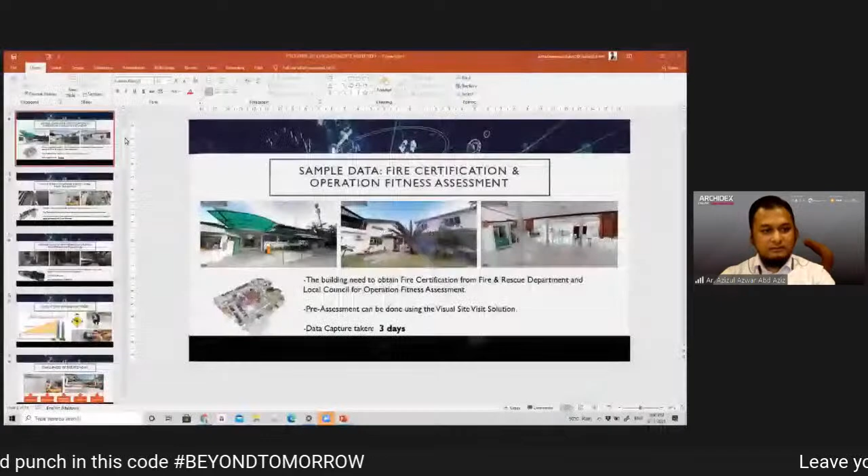So the topic is the future of conducting site inspections using 3D data capture. When I say future, it's not really a new industry; it's been around for quite some time. The data capture has been used in oil and gas for about 10 to 15 years, but it's quite new how the architecture or building industry started using the technology for managing projects, collecting data, measuring buildings, and so on.

I hope this small step of ours can benefit the architecture community a bit. So basically, how is 3D data capture actually being involved in the construction industry? Because like I said, it was in the industry for quite some time already. But then when the pandemic came, it triggered people to see the benefit of using it more and more. Before the pandemic, it was something that was good to have.

So we hope that after the pandemic, after we use it on certain projects and expose it to certain clients, that people see it's not something that is good to have, it's something you must have for a project.

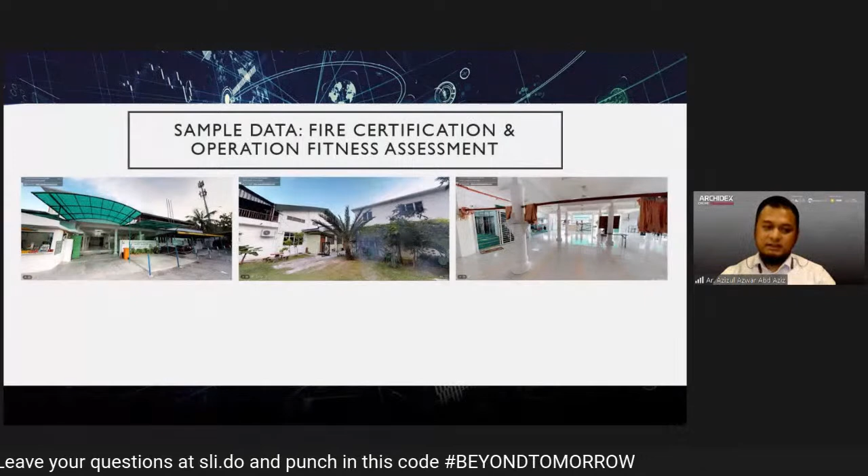So I'm going to start with some of the projects we did. This is a small project - actually, I can say this is our first project using the data capture. This building needed to obtain a fire certificate from the Fire Rescue Department, Bomba, and local council PBT, for the operation fitness assessment.

So what we did essentially was a pre-assessment using the visual site visit solutions, or what we call 3D data capture. For a building of about this size - around 3,000 to 4,000 square feet, a two-story building - it's a complex building, quite big.

What I'm going to share with you is how the output of the data capture will look like. So assuming you are my client, I'm going to present to you - this is what the building is like, a walkthrough inside the building. This is what we show to the client, what we have at site. This is actually a completed project.

When we capture the data in the progressive site, say for example this part of the building hasn't been plastered yet or we haven't put paint yet, we can see that. For this particular month, this area hasn't been plastered yet. So for the next month, we can see the progress. It's easy for a client or QS to evaluate if we want to certify the progress payment and so on. I'm going to show it to you simply.

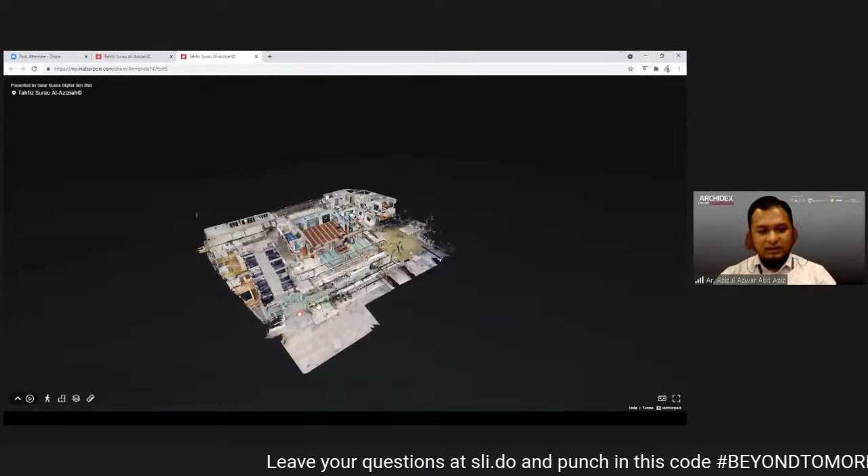So this is one of the outputs, the value of the output that we can introduce to the QS on the team. So the data capture, the output is something like that. You can have a dollhouse view, right?

You can rotate it. It's really what we call a lights platform. You don't have to install anything. You just open the link, click the link, and you can open it through your phone or laptop without using any other platform or installing any other software.

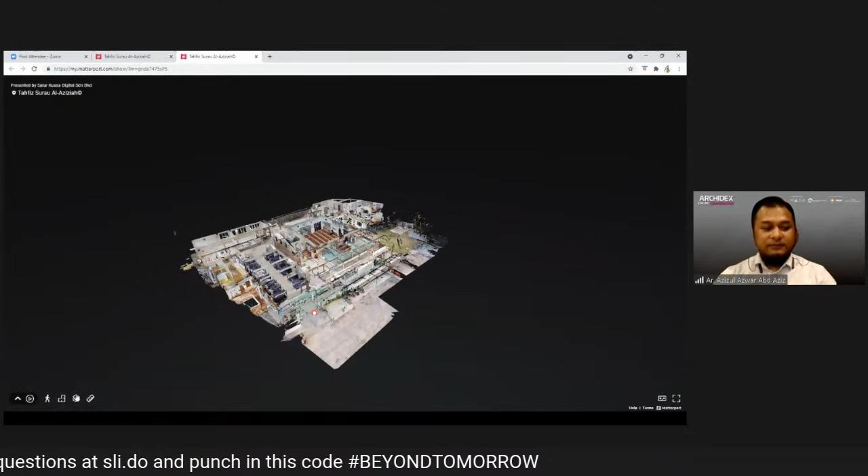So we can either decide to go to the second floor, and we can straight away get inside the building as if you are measuring the site. If you go to the first floor, for example, okay.

Like I said, when you are capturing your data, sometimes you miss certain points, for example how many rings inside for this column. So you have it, but you forgot to capture how high is the gap between each ring. You can always get the picture and just measure it.

For example, let's do some tests. So this tile is actually 1 feet. So we can measure the tile and we get 1 feet. That's how we measure the data.

For this particular project it's for sampling only, we don't take detailed data. If you go for detailed data, we use a high resolution camera, higher spec, so we can get more accurate information. For this particular project we just do something simpler.

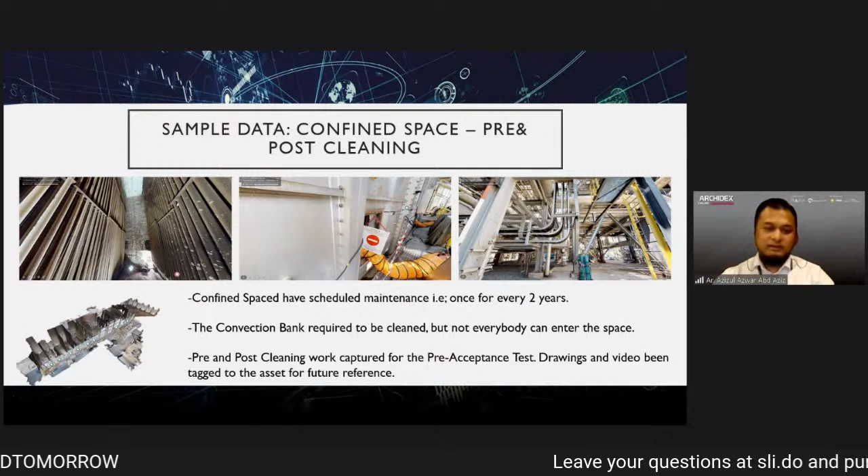This second project I'm going to share with you today is actually a confined space in the oil and gas industry. For this particular project we have to conduct cleaning services. The contractor has to conduct cleaning services for a confined space, but the client wanted to see if it's really clean. The confined space is not really safe for everyone to enter, it's dangerous, so you have to have a certain license or be equipped with certain equipment before you can enter the place. So we enter the place and get the data before and after the cleaning services have been done.

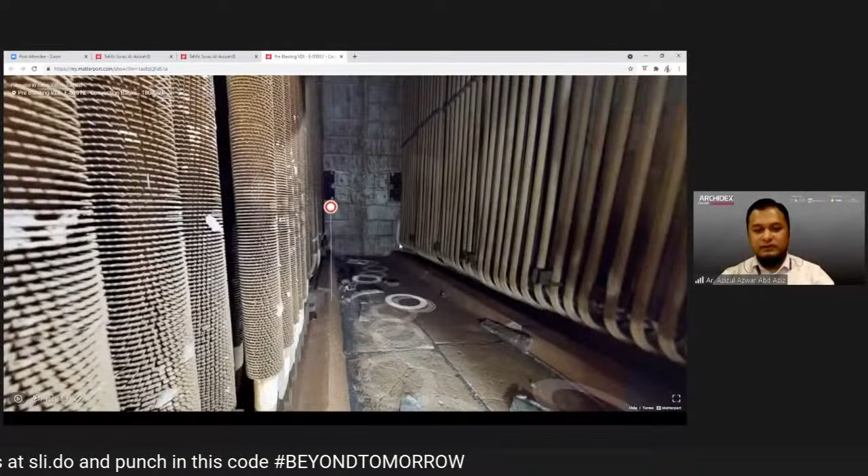This is how we call it blasting, the cleaning, we call it blasting. This is how the building looked before it was cleaned. You can see the dust in the gray area, gray dust like that. So we can link the two scenarios, before and after the blasting. This is how it looks after the blasting services, the cleaning services, have been done.

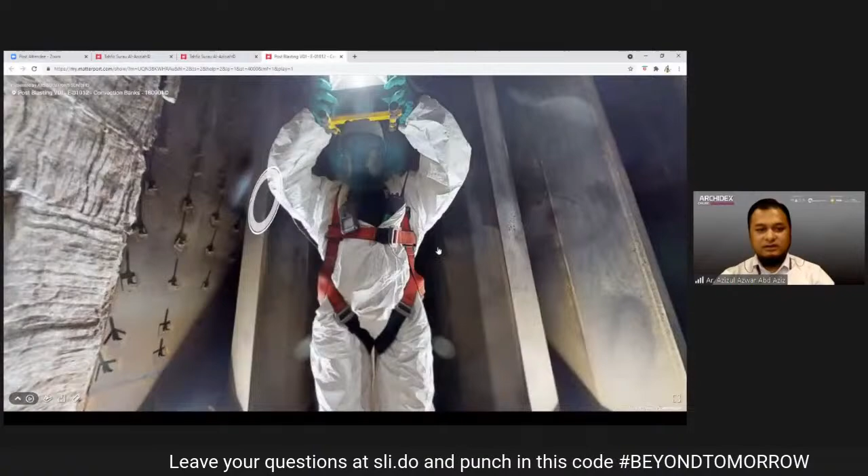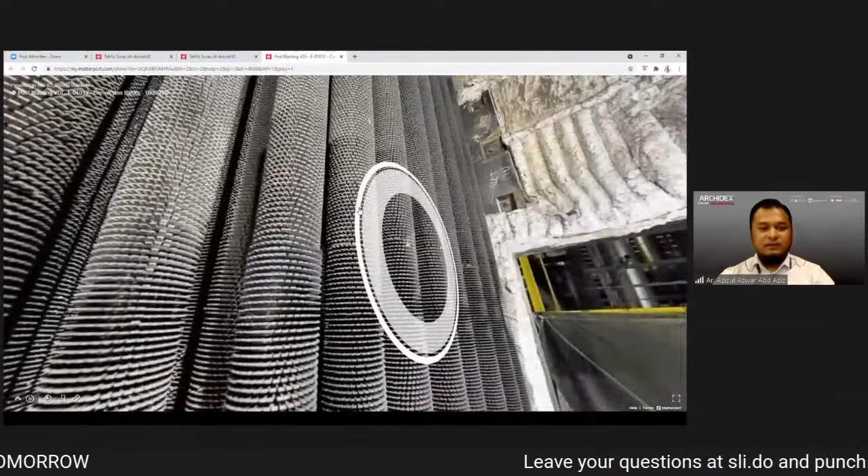If you're familiar with the services, then you understand it looks a bit different. This is what we show to the client. We can show either how many kilos of dust have been removed from the area, and we can link it with the video. That is how we share with the clients the progress of the project, things like that.

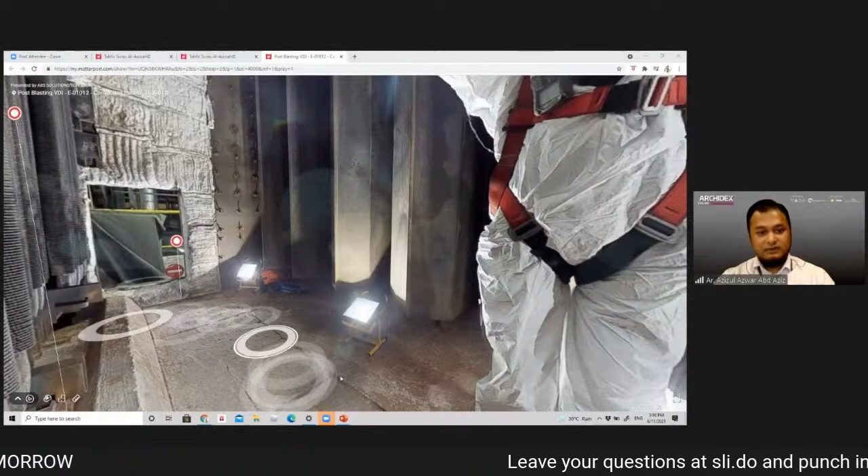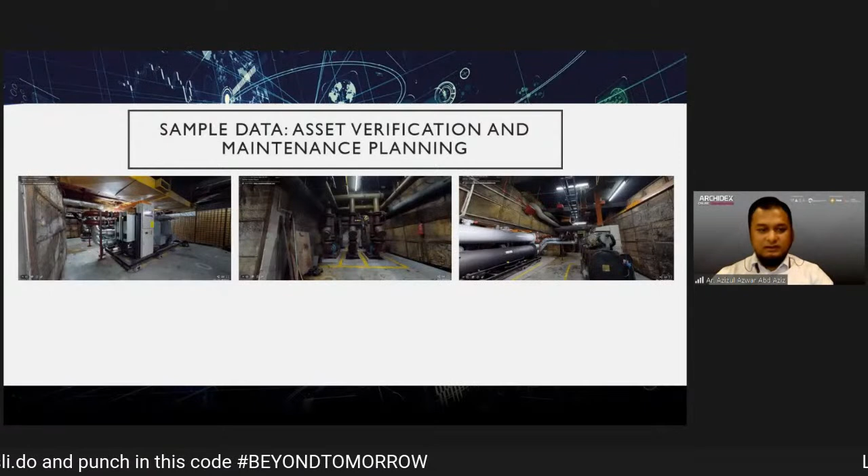So basically, another sample. I'm not going to share the link of the video, but it's quite the same. When we measure pipes of the M&E room, for example, for this particular project, the client didn't really have as-built data. So we came in because it needed to be done quite fast, to get the data quite fast, to produce a drawing quite fast.

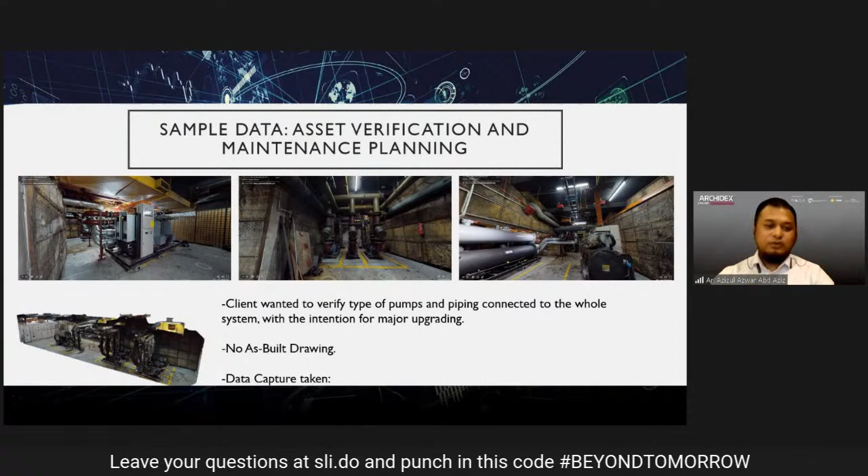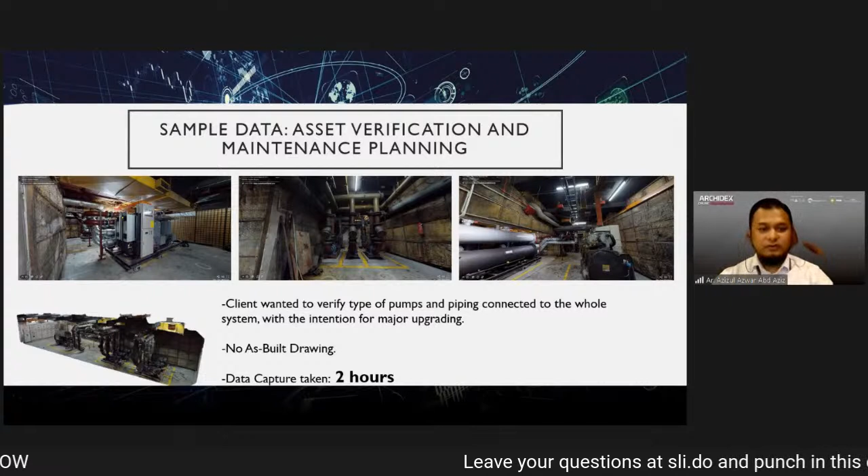So they engaged us, and you guess how long we took the data, without having to come back again? Just 2 hours. We went to the site, captured the data for 2 hours, and then we went back and started producing the 3D drawings from there. So basically, that's how 3D data capture is - it will put whatever methodology was used back then into obsolete.

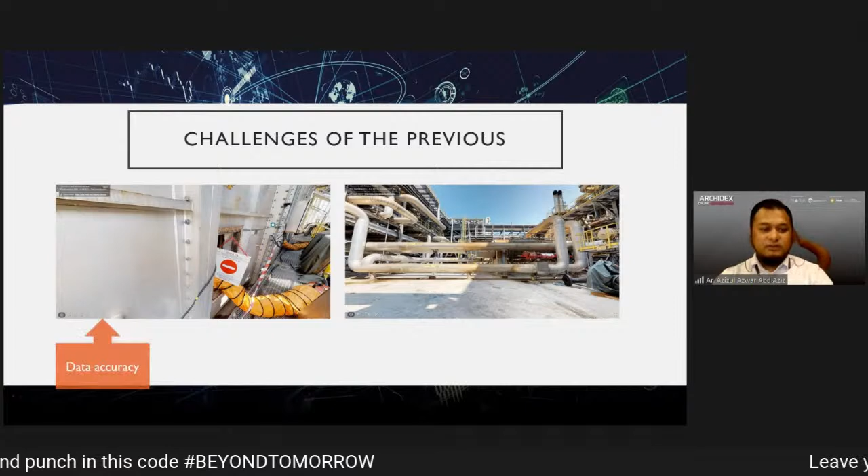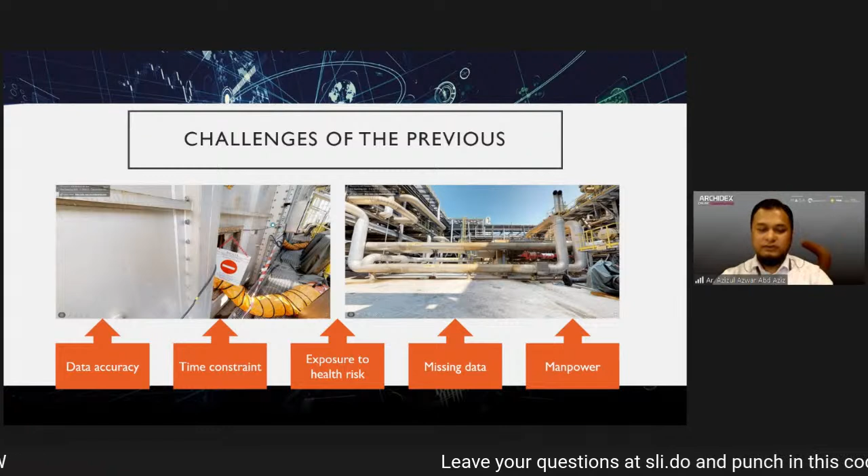So why do we try to engage with the technology? Because the challenges of the previous method - data accuracy is not that accurate, there's time constraint, exposure to health risks especially during COVID, and in oil and gas we try to avoid non-skilled people going to site without full protection or understanding how they should go about on site. We want to reduce missing data, and of course have lesser manpower.

So what needs to be improved here? Basically, the improvement is to reduce durations, reduce manpower, and the client or whoever wants to review will have live feed info. We're going to improve the accuracy of data capture, and it can be accessible faster to anyone we want to give access. And then, we're going to reduce mistakes, because from the data we're going to draw exactly how it looks like. I'm going to show you a bit of the image of how it will be imposed.

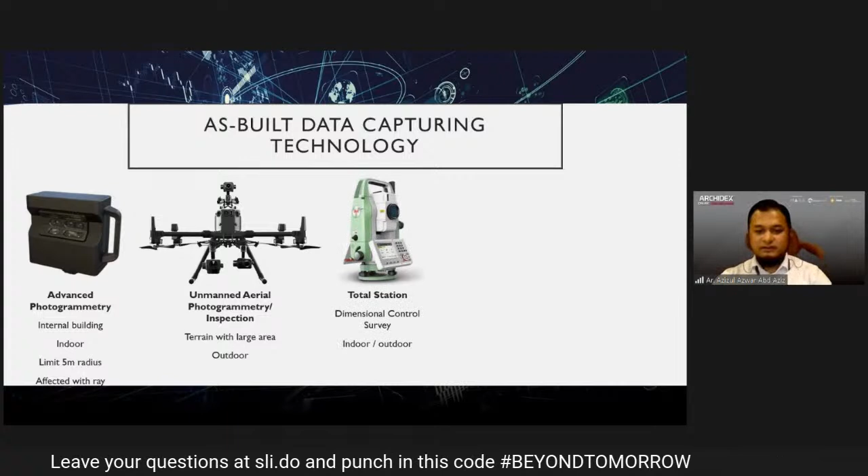So as for the accuracy, these are some of the equipment being used. I think some of you have seen the camera, advanced photogrammetry, drone, total station, or radio topography. Also we have 3D laser scanner. Most of what I'm using is actually advanced photogrammetry and 3D laser scanner.

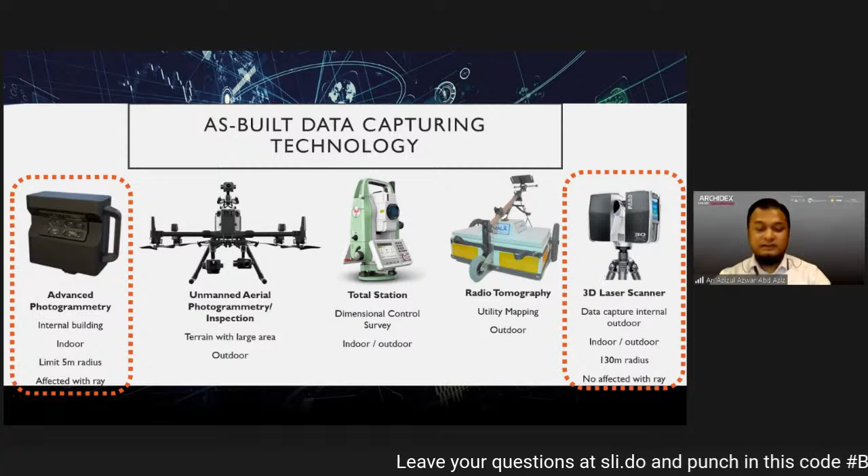Because of the purpose we use to capture the data, we don't need to go above the building - sometimes we don't need to go above the building. We can actually capture using just the 3D laser scanner. From that scanner, they can predict or model what's on the roof. So we just use those 2 scanners only.

But for the challenging sites, like stadiums, things like that, we use the drone for the data capture. So how it was done - basically first we will go to the site and capture the data. We will upload into the cloud, and then from the cloud we will extract the data.

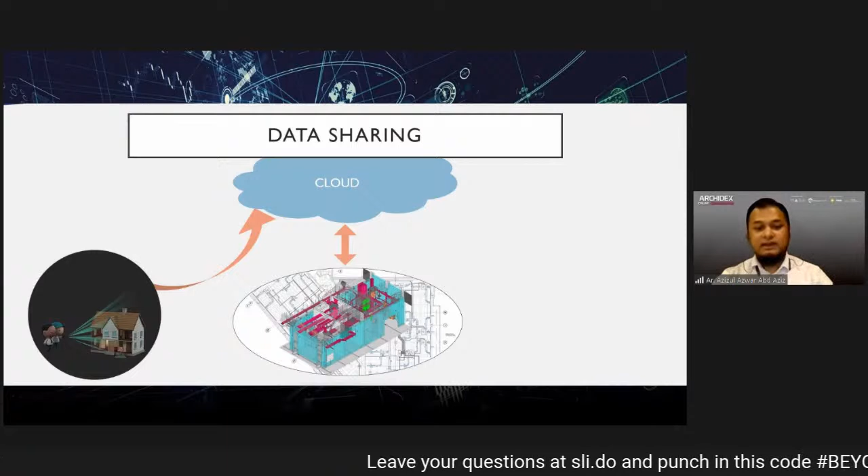The data is actually, it's like you go on Google Street, right? So you can walk through this building. When we capture, it will be stitched together and produce a 3D environment inside the cloud. So we will trace the data, the building, the elements, because the element is actually in XYZ kind of angle. We can trace it and produce data, then upload back to the cloud, and the client, while flying, can view whatever information they want to see. They can view the 3D data or the model data that we upload into the cloud. So basically, that's how we are doing it.

Most of the projects I share here are actually oil and gas projects, because we want to share how accurate the data can be produced or captured using the technology. So this one is actually in Hong Kong. Those are the dots on the far left, on the Google Earth image. On the second image, that's the data we captured.

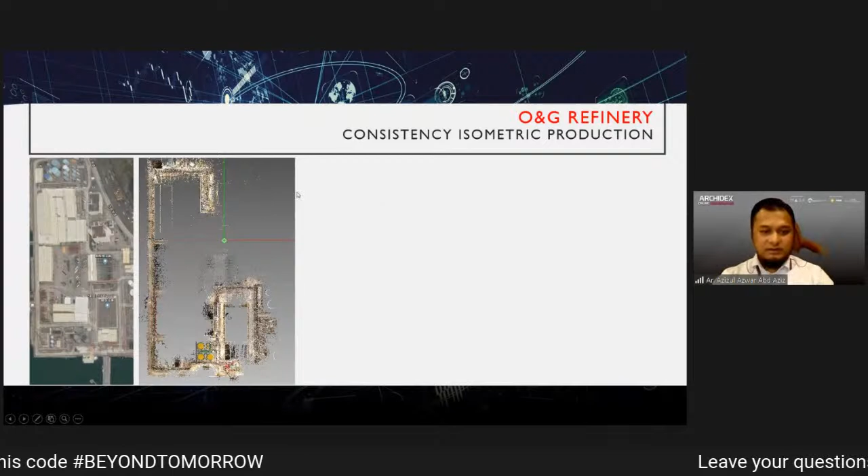The gray area is somewhere we don't go, so we don't have the data - it's not necessary to have the data there. From there, we superimpose the data we captured into a 3D model that we produce, shown in yellow and green. You can see the green line.

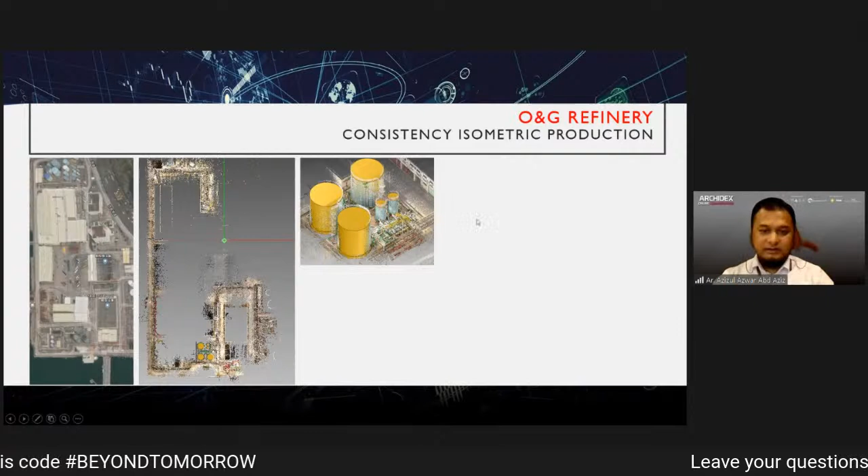So here is actually the final product of the 3D data that needs to be produced or shared to the client.

And we can have survey reports, 3D model reports based on this, or 2D CAD drawings. It can be produced in any way. So it's actually a powerful tool or equipment that you can use to enhance your skills and your service to your client.

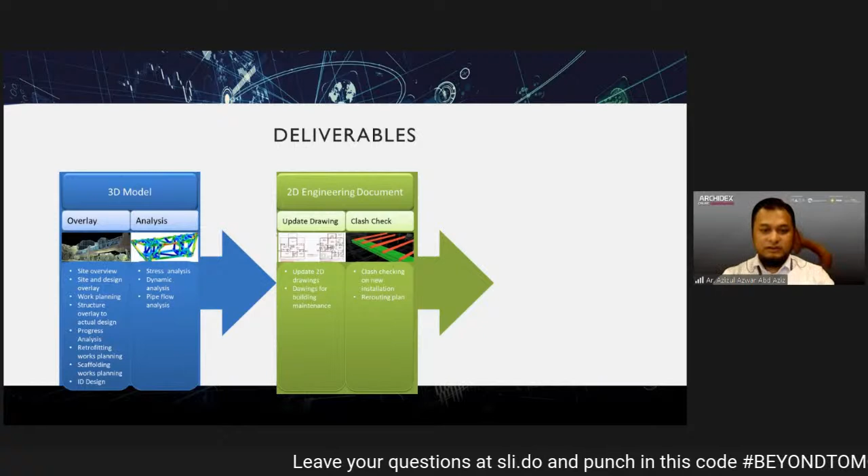For this, some of the deliverables we can produce include 3D models overlaid with existing buildings and also the new design. We can produce 2D engineering documents, which are all architecture drawings, and then engineering reports or architecture reports or building reports.

So here on the far left is actually one of the data sets that we captured and reproduced as drawings.

In oil and gas, they have monthly or quarterly checking, so they have to check the pipes. Is it still in order? Is there any additional pipes? Is there any loss of oil along the way, leakage, things like that?

So they have to constantly produce as-built, because when they created a new pipeline, sometimes no one knows about it. So when they went to site, they'd ask, why is there another pipe here? That's why they need to constantly use it. That's why 3D capture is quite handy for them.

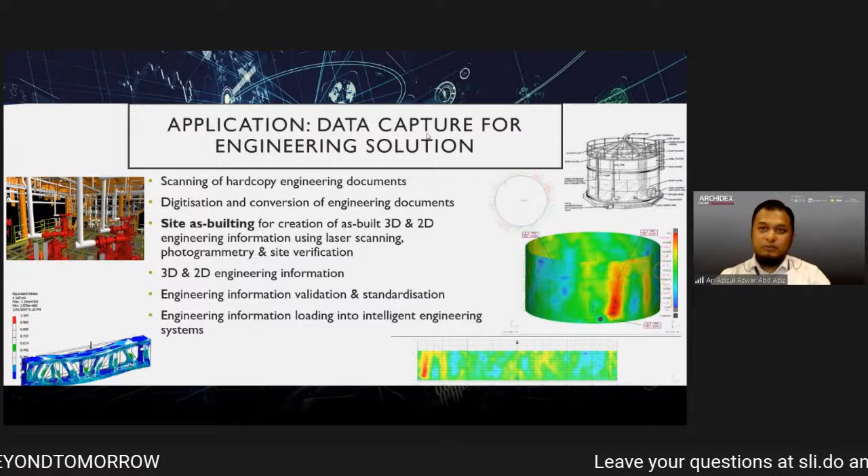For the construction stage, how will the 3D data capture benefit it? Actually, we can have a phase-by-phase development monitoring report. You can produce a report monthly - you go to the site, capture the data, and then produce the actual current conditions of the site.

So next time, you capture another set of data. When a contractor tells you how much you should pay them, you can approve it - this is what you've done last month, this is what you've done this month, and these are the differences that you should be paid for. So it's actually a phase-by-phase monitoring report.

You can provide retrofitting, design changes, fabrications, or you can have the dimensional control survey of the site.

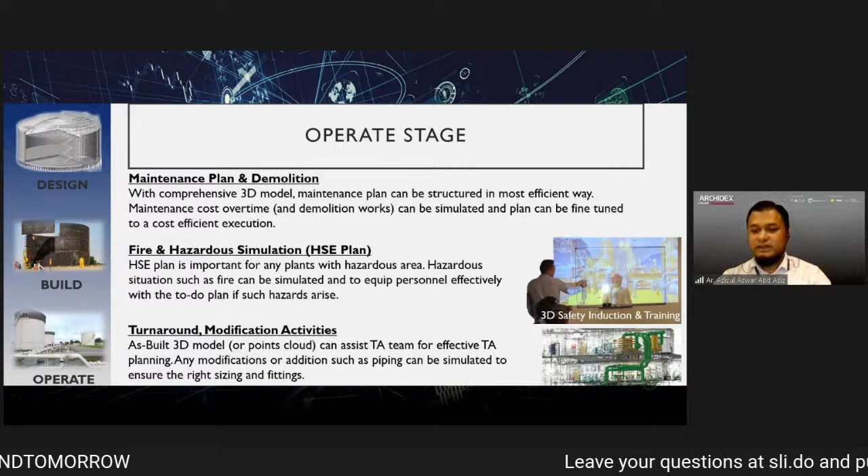During the operation stage, we have maintenance planning and demolition. Before you demolish the building, you can plan ahead - you can identify what type of crews you're going to use later on, and what type of equipment or machine you're going to use for demolishing the building.

It can also be used for fire and hazardous simulations - I'll show you in a bit - and for turnaround modification activities. So basically, you can assist your team with effective planning.

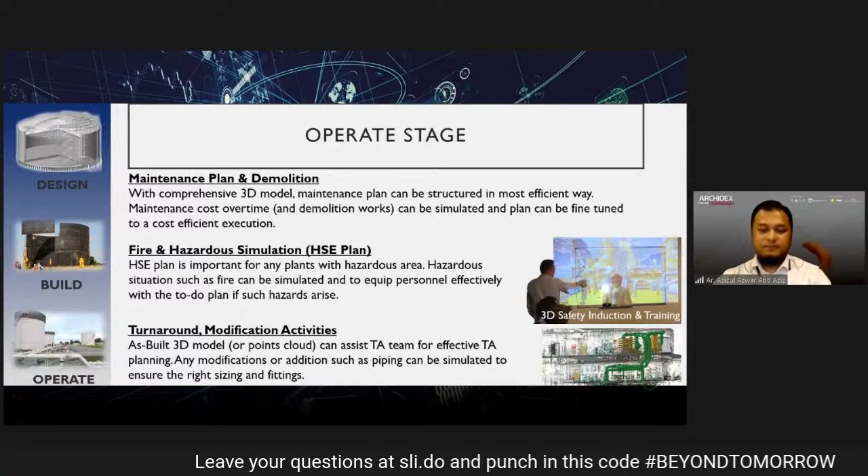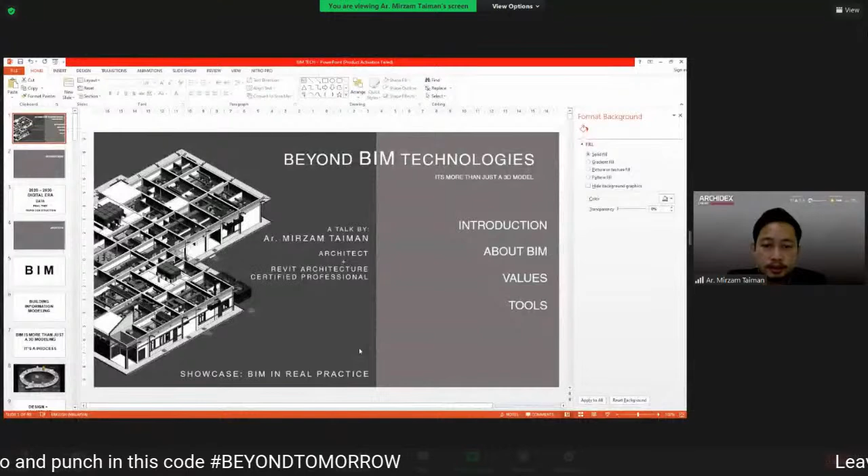Okay, let me start with the slide. The title is about BIM - beyond BIM, technologies that are more than just a 3D model.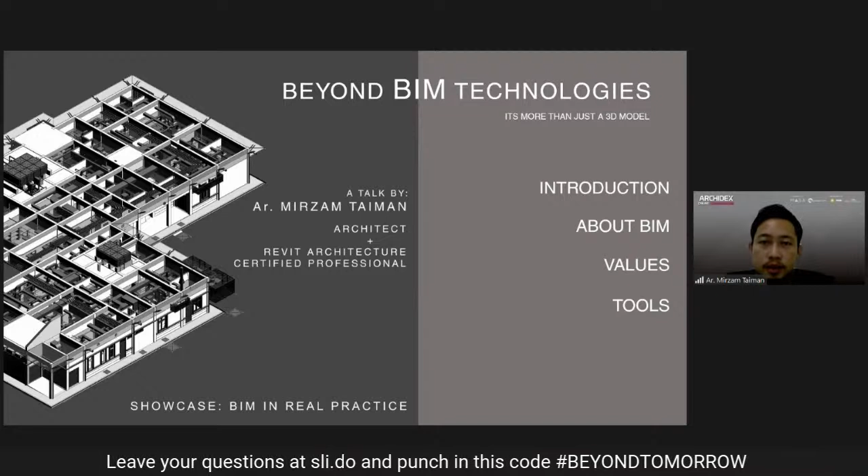I will guide you through some pictures and my experience after involving in BIM, started in 2012 until now. So let me give some introduction here.

Actually in this era, 2020 until 2030, this is the digital era where everybody must be aware of this. Architects must take lead in this era in digital platform, because in this digital era we play with data, big data, and then we play with real-time simulation, and most of construction goes for rapid construction. They have several new ideas and revolutions in construction in this digital era. This is the target in these 10 years, until 2030.

What is BIM? I will share about this, because BIM is building information modeling. This is what we are going through in the future, the near future, because this brings more value in our AEC industries. This is not just 3D modeling - it's a process of building a single model, and then you can develop from programming, conceptual design, detail design, analysis, and so on, until the construction has been done and straight to the operation and maintenance stages. This is the cycle of building information modeling and the technologies involved here.

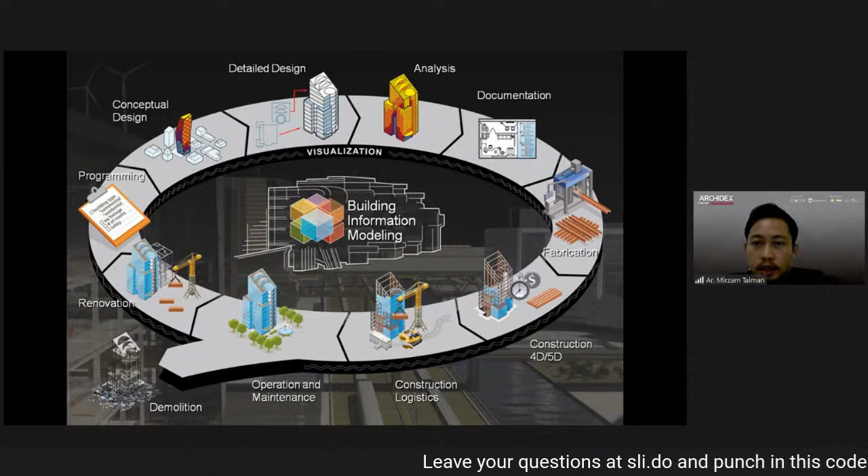BIM can be considered as design - we design and construct a building virtually, in computer, in software and tools. We see problems in digital, and we solve in digital.

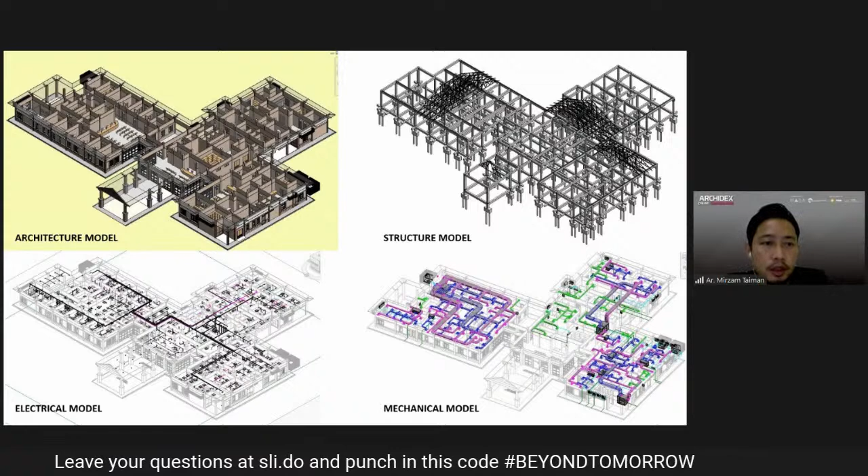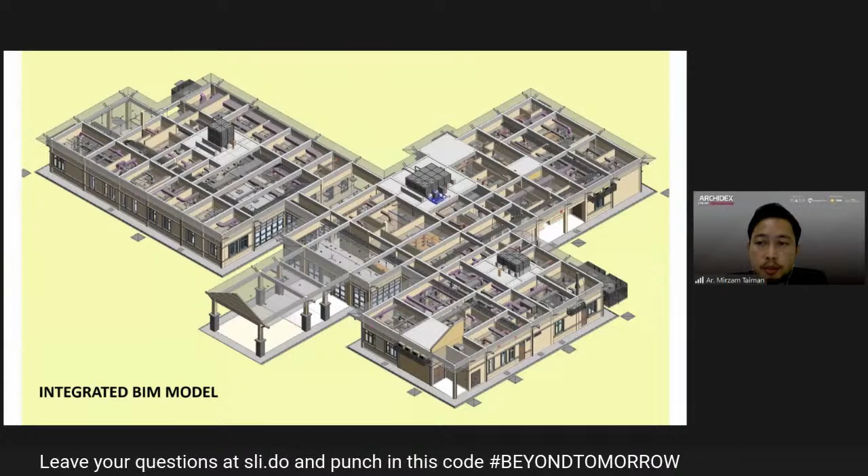We have an architecture model, a structure model, electrical model, and mechanical model, and then we combine them into one integrated model to show the complete building. This complete model can be used in design, in coordination, through construction and so on, until operation and maintenance after the building has been completed. We can see those services, structures and architecture models combined - it looks like a finished building, but in virtual mode.

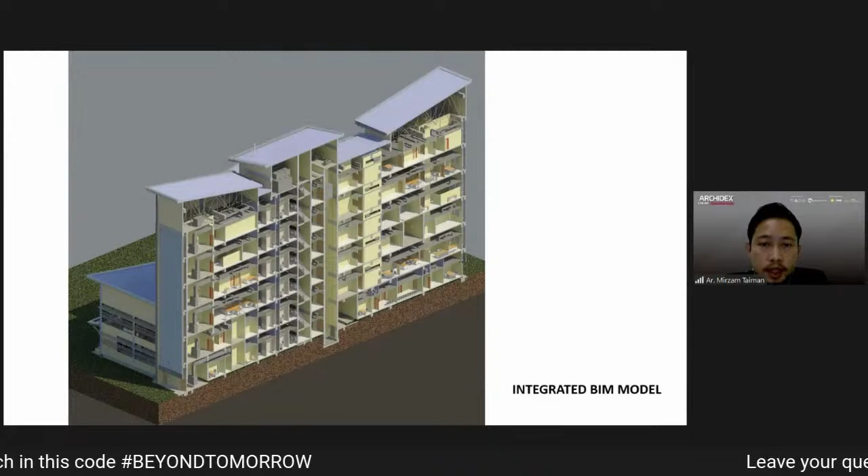Here's another integrated BIM model sample. We can see those services in buildings and all the integrated models inside. In 3D view, we can see those spaces so clients can understand, because the client is a layman - they can see what is going on in their building, so it improves their decision making later in the design process.

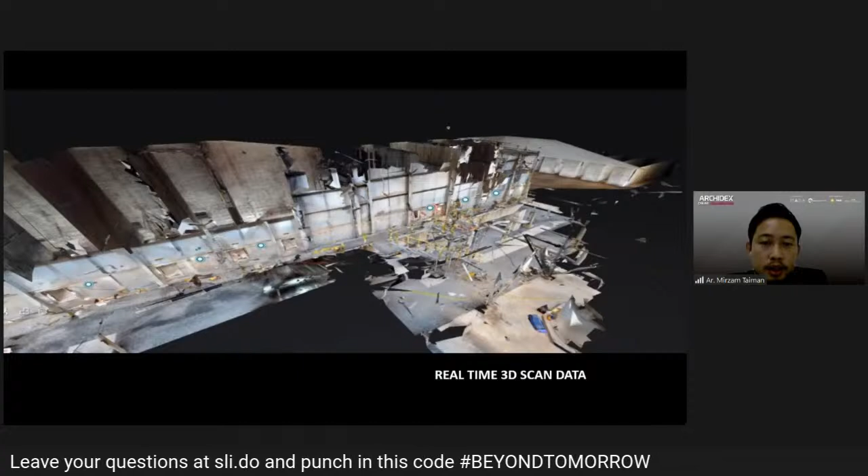In a BIM model, we can also remodel a building virtually from 3D scan data as a BIM model. This data was captured from the previous Azizul Azwa lecture. From this data, we can make it into an accurate 3D model based on site measurement - real-time 3D scan data. So it helps a lot.

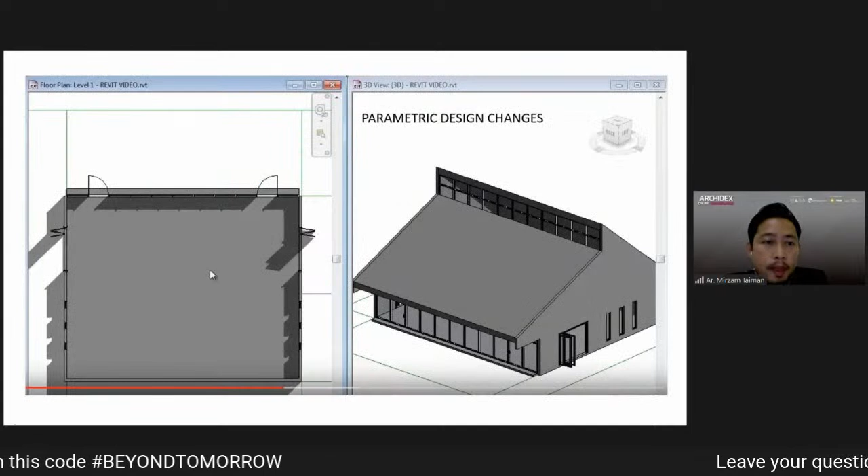The model comes with information and parametric behavior - it's not a dumb model, it's not a surface model, it has information and parametric design. Once you make design changes, because the model is parametric, when you change a component on plan, it will automatically update in elevation, section, and all views - because you're changing the component, not drawing lines.

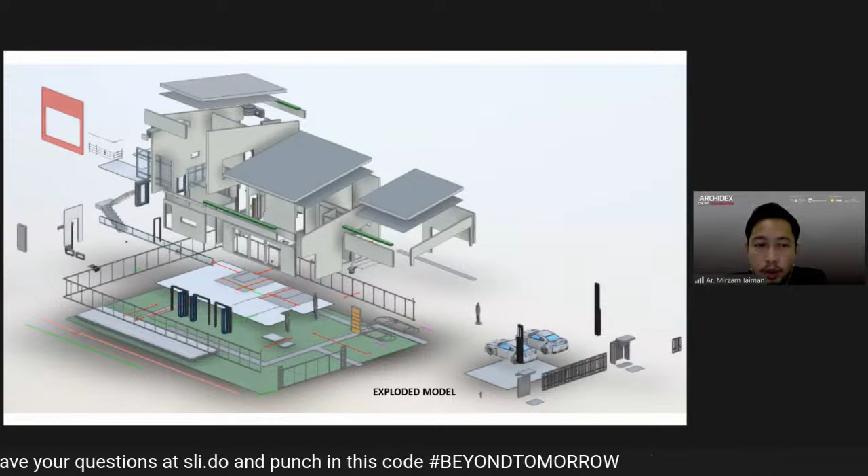Next, a BIM model is component based, not line based. Let me show some pictures. Because you are modeling a component base, you don't draw a line for walls, but you model walls, and then you model doors, and put them into a certain location to build a building in virtual mode.

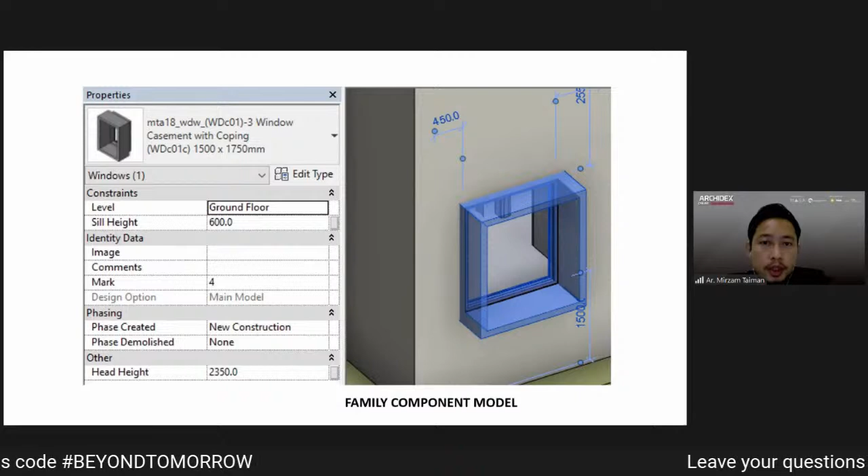The model has several properties and information with dimension, materials, and location—really complete data. That's why we call it building information models. This data is really useful in design and then in construction later.

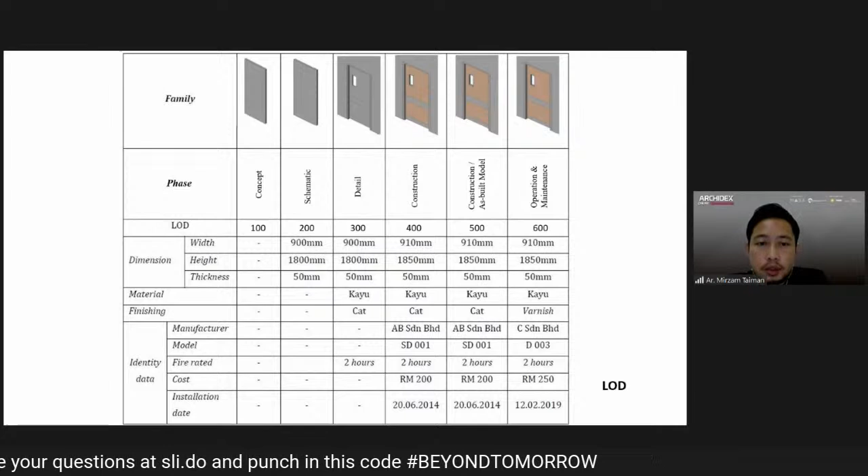Really integrated. This is the phases of design development of the model. Before going into detail, we start from the concept, and we call it LOD 100, 200, 300, or 400 until 600. The model keeps changing parametrically, with the information data inside the model instead of just geometry.

We can improve site inspection and decision making using a single model that we have done from the integrated models. As in our previous project, we were doing this kind of exercise.

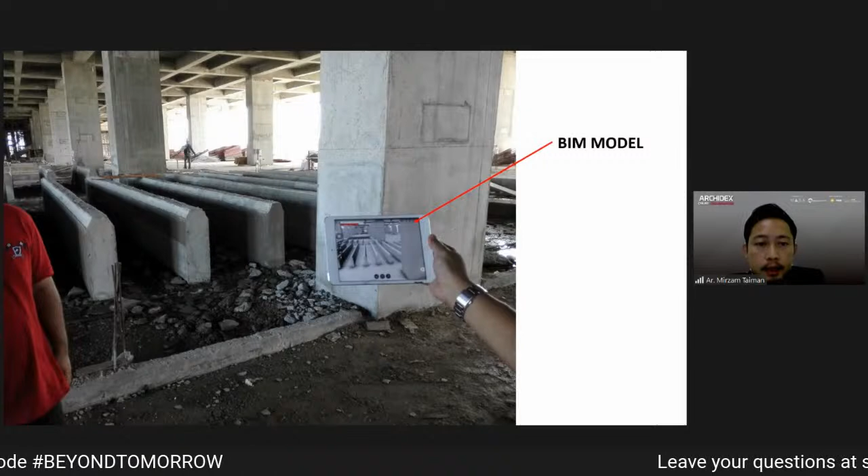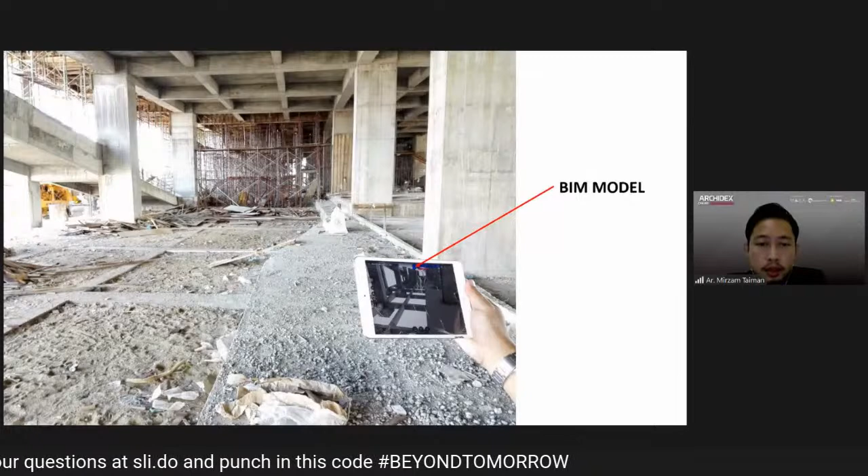With the BIM model, we open an overview of the BIM model on iPad, and then we go to site visit and look at the progress of the project. We can mark and see whether the building is built according to the model, or if any discrepancies happen that we can detect. Later on we can discuss and prepare or give a decision on what we are going to do after this in the meeting.

So I'm sharing some values of this technology. What you have to do is have a single BIM model, but you can elaborate more—you can have more with this single BIM model. You can have 3D, 4D, and 5D elements.

3D is for design, production, visualization. AEC is architecture, engineering, construction coordination, and clash detection. As well as from the model we can produce and generate drawings and documentation.

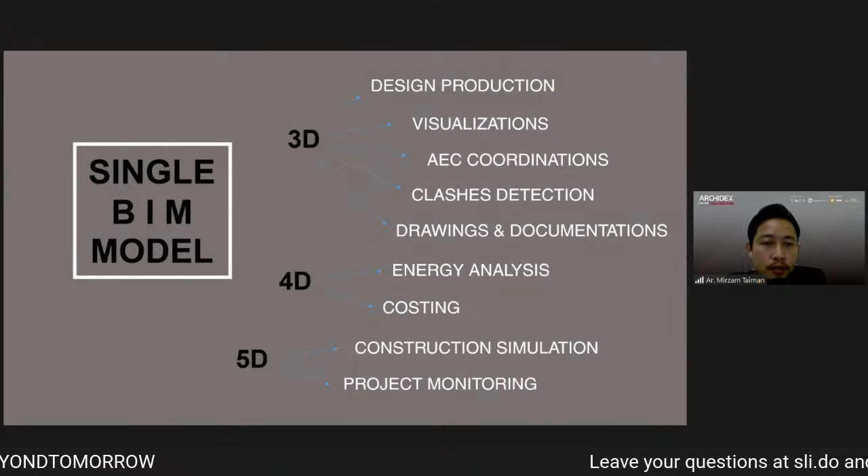Going to 4D, the model can be used for energy analysis, and for costing—it helps QS a lot because they can do material take-off from the components easily within the model.

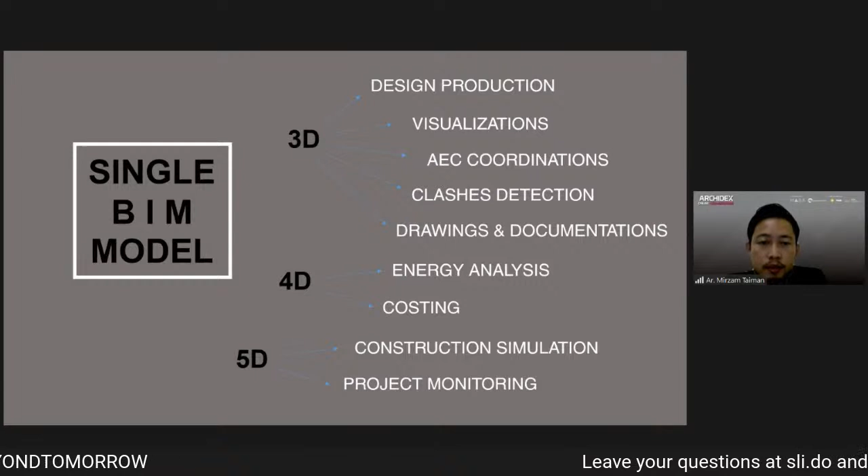And into 5D, more into construction simulation and project monitoring. We can visualize the construction simulation, visualize site logistics, and so on.

Some overview—we can have BIM models, and you can plan and design, have visualization for presentation, have drawings and documentation, do costing from a schedule generated from the model, and have an energy analysis model from that single BIM model.

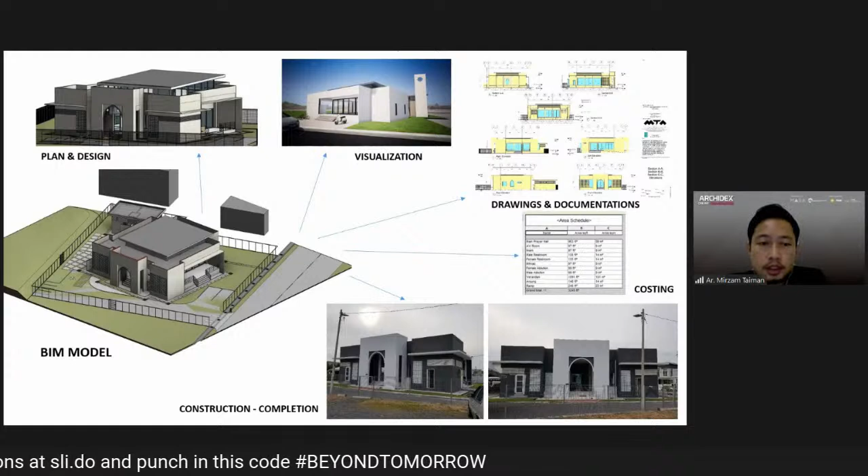Another sample of our projects—plan and design, visualization, drawing, same repeat routines and same objective. Until construction and completion, the building is completed the same as the model we have done. It helps contractors to visualize during construction.

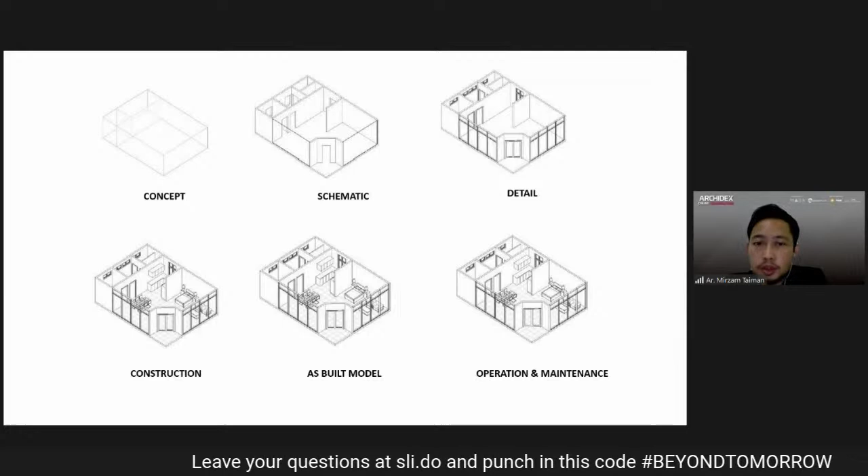So visualization, this one is most crucial in early stage. We start from a concept, and this is the development of the models. We must go through these stages before going into the detailed model: concept, schematic, detail, and then construction, as-built, and operation maintenance.

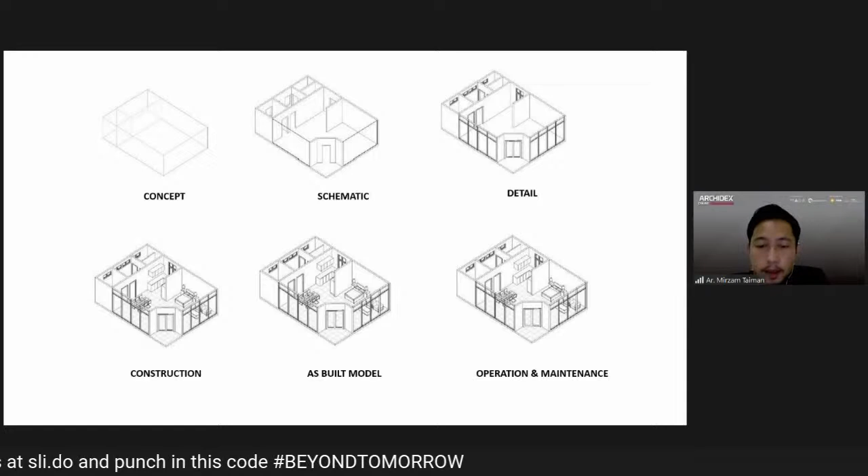This is the flow. The model stays the same along the way, from construction until operation, but the data becomes more informative, with more variables of data inside the models.

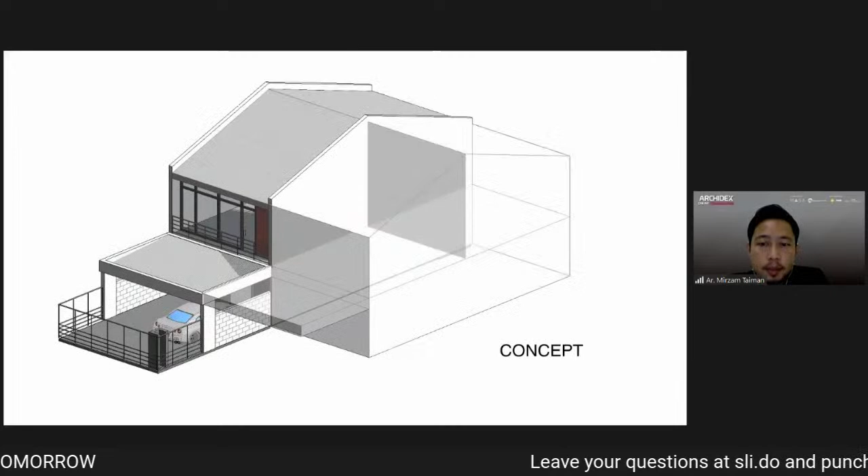We can have some massing forms, custom made. You can explore the massing form using the software, and develop the building forms. From the concept you can develop until detail design with information, and with the help of this model, you can also have rendering and animation within the single model. This is an interesting part.

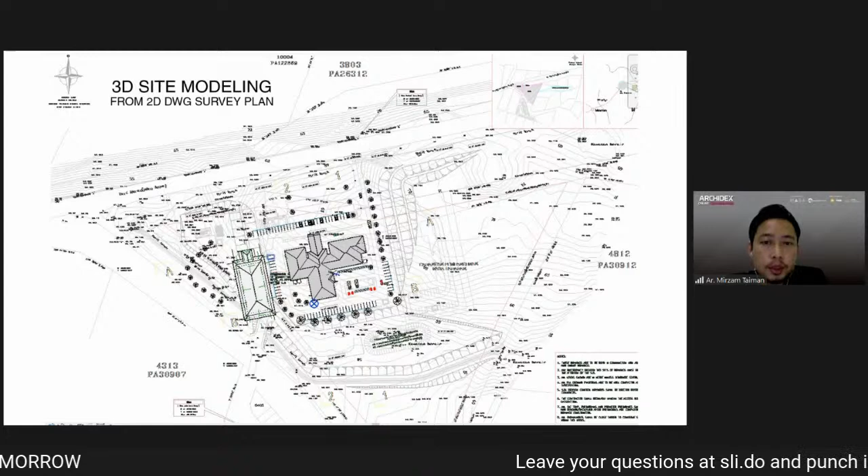Beside a building model, you can do 3D site modeling from a 2D DWG survey plan, because your 2D drawing survey plan has level data, and then you can export and generate a 3D site model like this, with the surface from the survey plan drawing.

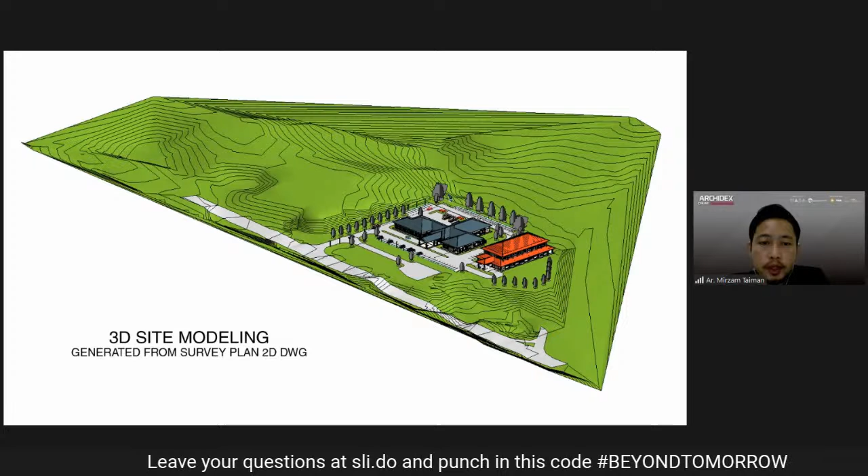The software captures the data, and then you can get the high and low level of contours. After that, you can set the platform in 3D model view. This is very helpful for architects doing site plans, and you can decide where you want to put a cut and fill area, and so on.

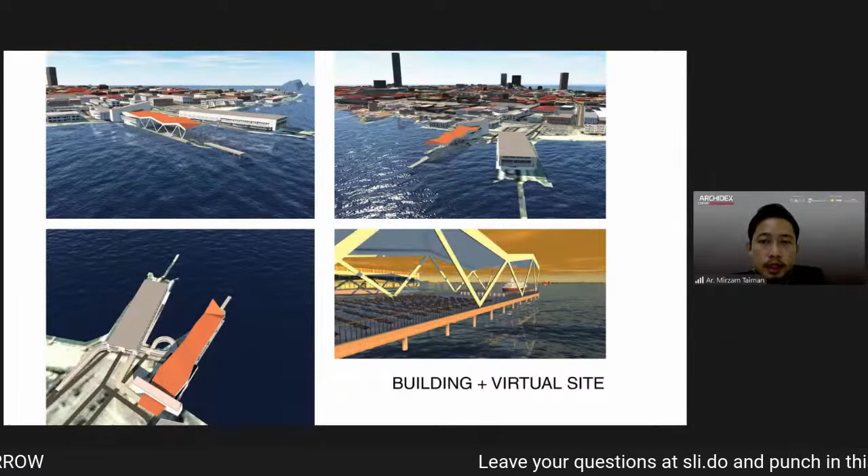This one uses Autodesk InfraWorks. Some locations in Malaysia have been captured real-time in this software, so you can plug your design in as if it's already on site, virtually.

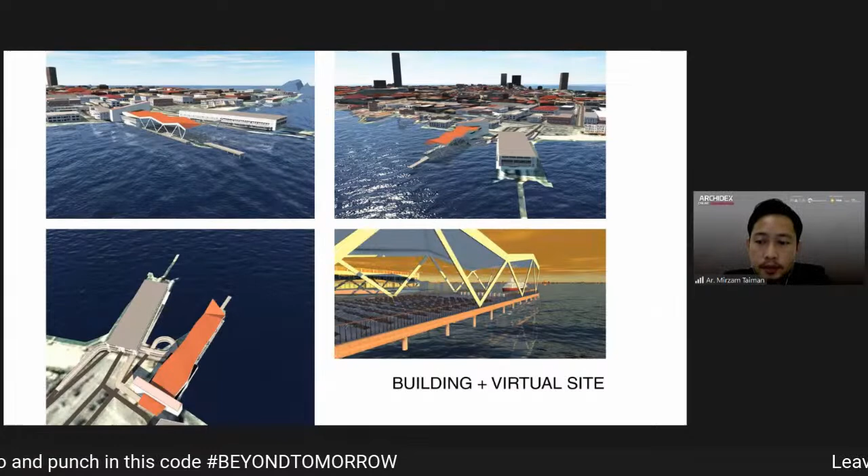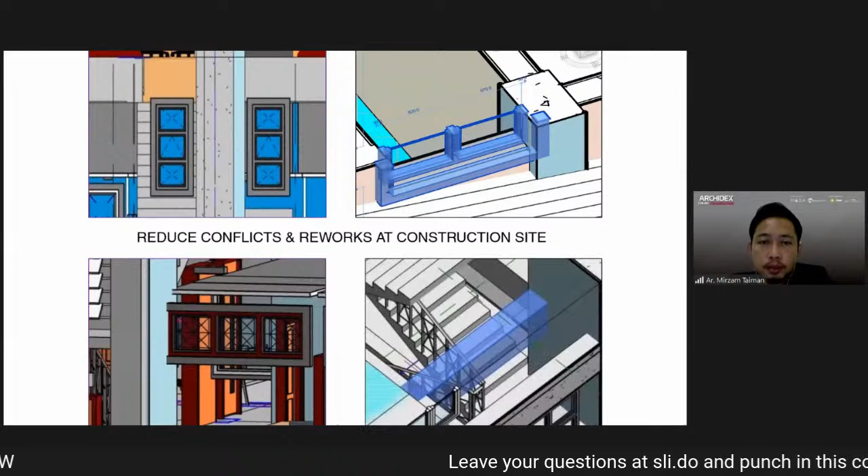This is good for clash and discrepancy detection. You can reduce conflicts and rework at the construction site, because in the model you can see those clashes. It helps you repair them virtually before casting on site, and that helps a lot.

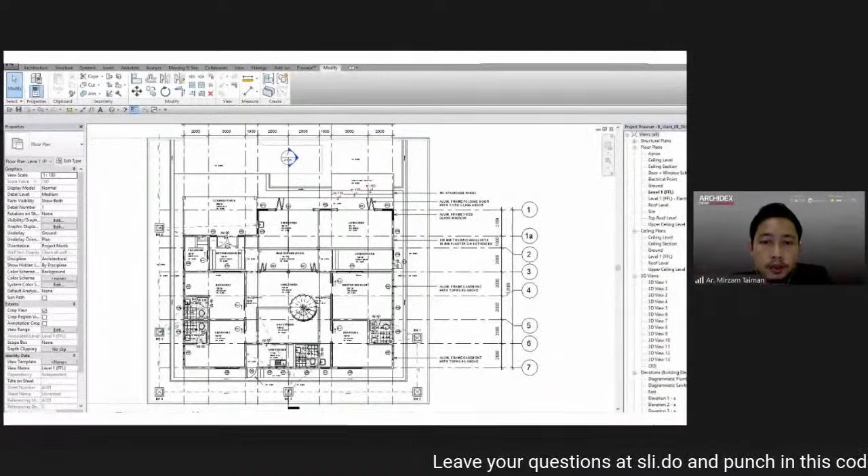Supposedly from 3D you can produce drawings, in 3D to 2D modes. Then the architect doesn't need to revert back to AutoCAD to prepare drawings and documentation. From the models, the quality of 2D drawing is very good. You can have detail like in AutoCAD, with quality suitable for submission drawings, detailed drawings, and construction drawings later.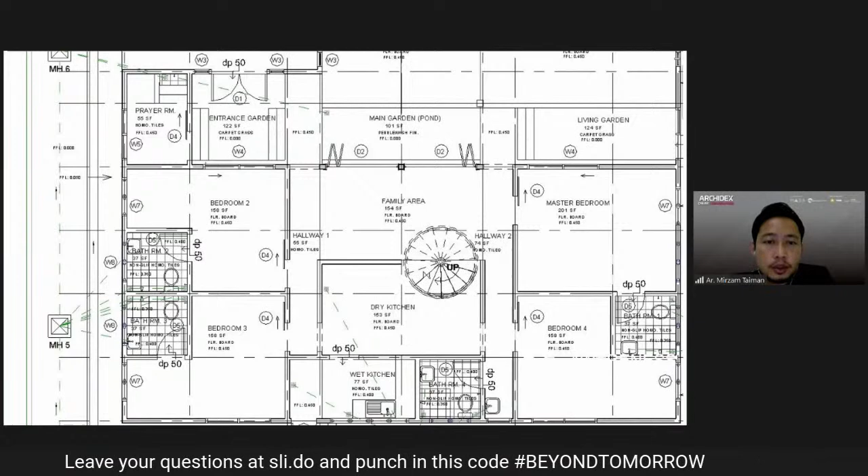The line weight is very good, and the printing is also good and very sharp. This is what we develop from those single models in producing the drawings. This is a sample submission drawing with color coding in detail.

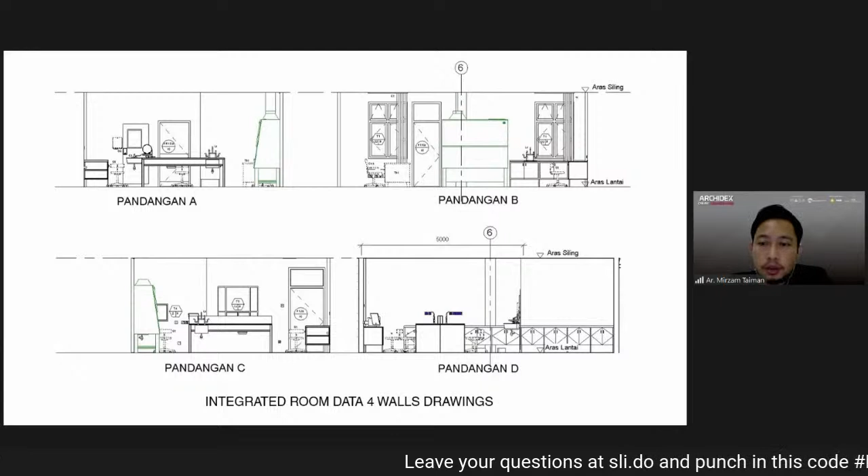One more thing, for hospital and clinic projects, we can also develop integrated room data for our drawings using integrated models. We focus on one area, with everything placed in one room, then you turn into every four-wall view, so you can see the view of your family's components without drawing it back.

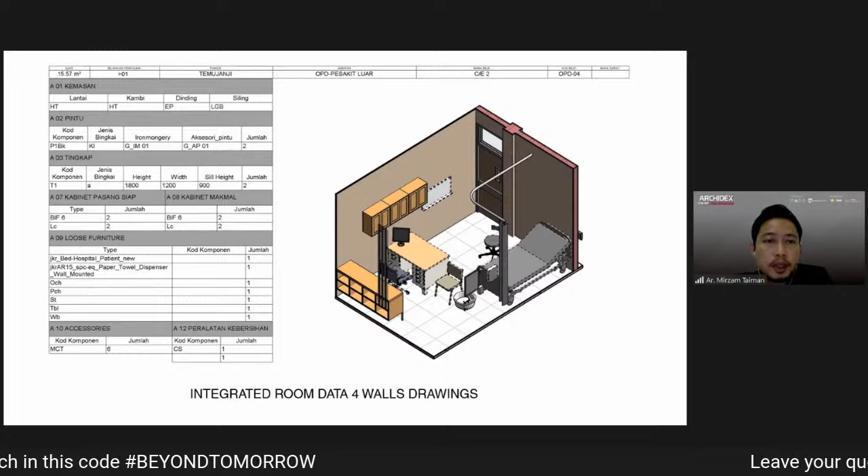You can have those 3D views, and in BIM the model can give you the quantities of equipment in your rooms, room by room. This is from our experience during clinic projects.

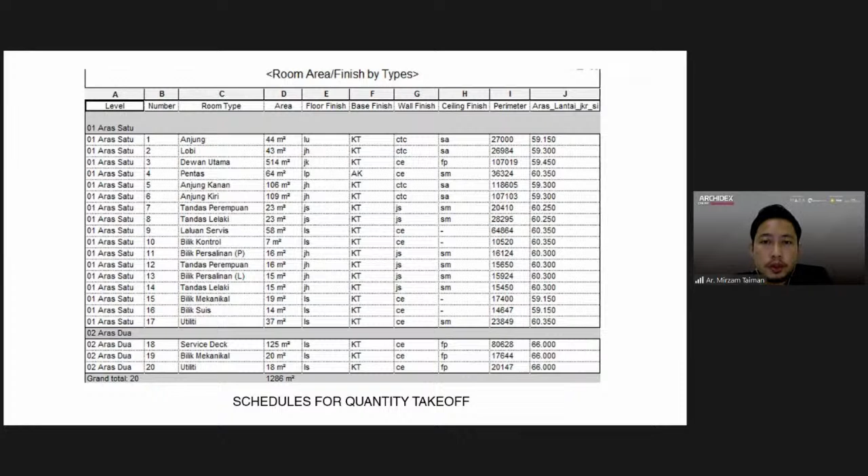For 4D, for costing, it helps a lot because you can generate many schedules, and for area, the model can calculate automatically for you, which is very helpful for quantity take-off later. Besides area, we can also have material information, as well as door and window quantities, which is very helpful for QS in our costing.

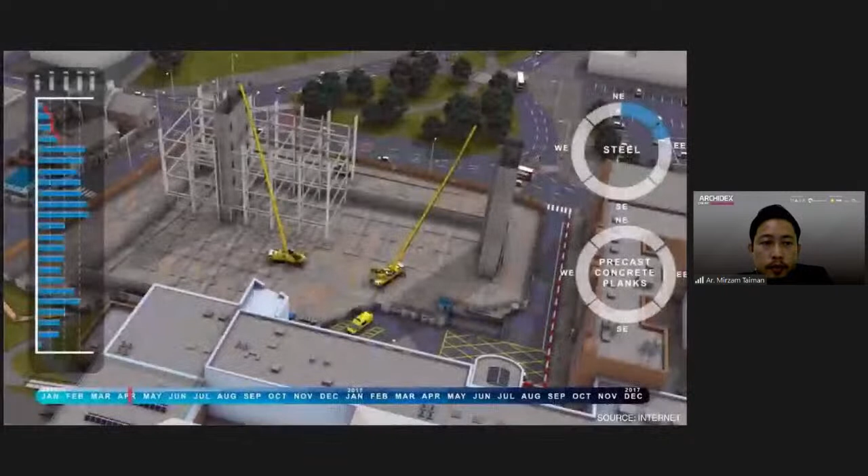And then coming to 5D, the last one: a single model can be used for construction simulation and project monitoring. This is the level we want to achieve, and we're still developing towards this level. We call this 5D visual technology.

We can use it for site logistics preparation, deciding where to put your crane, where to put your scaffolding, and your quarters, and so on. Previously we also experienced this simulation using a BIM model, whereas the conventional method only used 2D work program sheets.

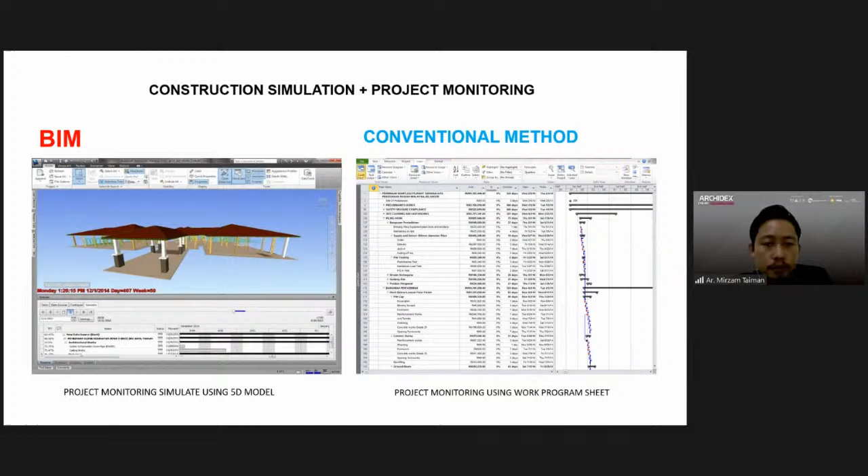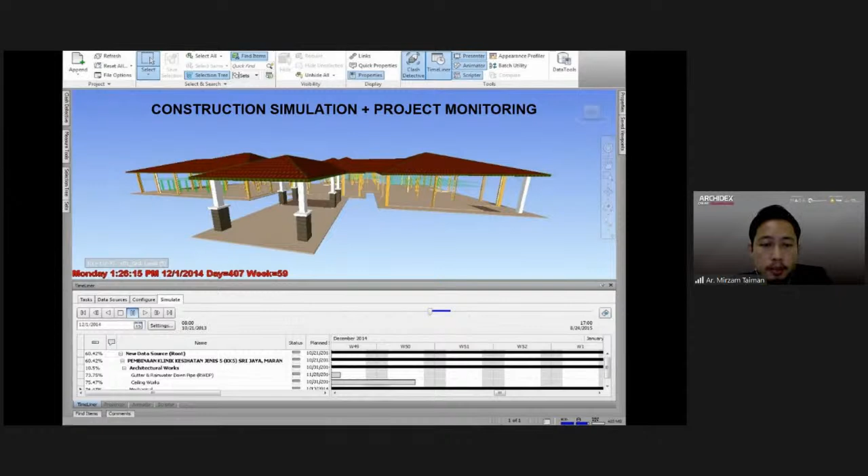But in BIM you can combine with your models, so you can see the model progressively built according to your program sheet. You can track one element at a time, seeing what is going to be constructed on a given day and how many weeks it will take, starting from the foundation up to the top level roof. We can do this simulation for your buildings.

It can be set in real time, with calendars and times, and then we can also target when it will be completed.

Beside exterior view, we can also do a simulation within the spaces, within the services, MEP services, beside every room. This is another sample of simulation we can do using one software, Twinmotion.

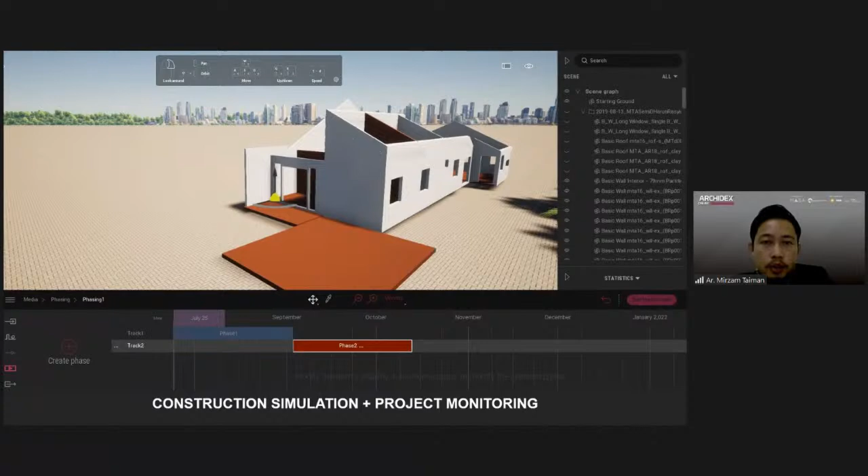Okay, for 4D sequence of construction phasing. This one is a real project. We have our project meeting, site meeting, using a model. Then we use the data for clashes, so we can detect in the computer.

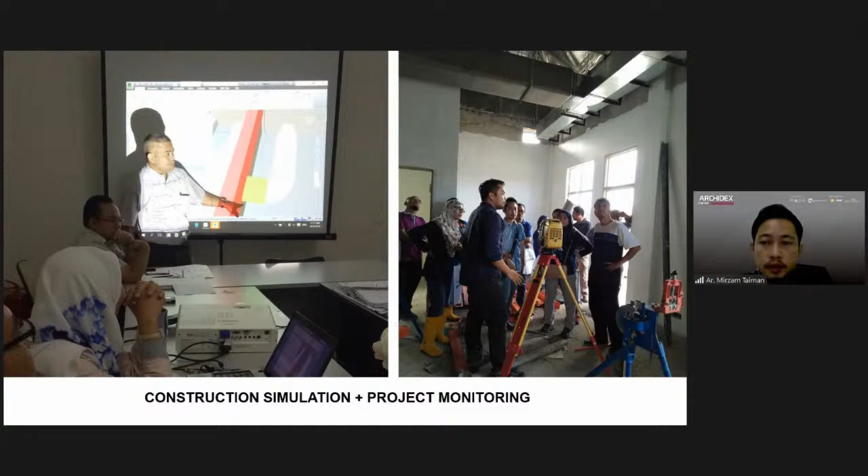And then the right view is we scan the spaces, one space after it is being constructed during construction, because we want to see the discrepancies or tolerance between BIM models and real buildings that has been constructed on site. We can see how much tolerance there is with the gap, and then we can solve it maybe on site.

After that we use a 3D scan camera, a 360 degree one. We can scan the overall spaces inside the buildings.

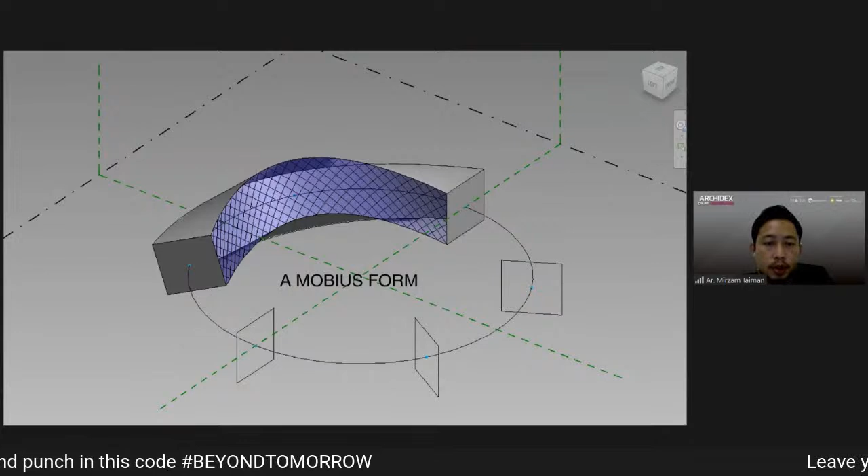This one is a parametric organic form. Beside that, BIM also can do a parametric organic form. We have some proposals like this, some curved buildings for hotel design, and then we can render it in proper visual versions. We can explore some explorative form, Mobius-based form, so we can propose some skin and building like this.

Then turn into rapid fabrication, because this single model we can use for fabrication. We have the data, and this is an alternative. This will be the trend after this, maybe single BIM model into one-to-one 3D printing house. You can print from the model.

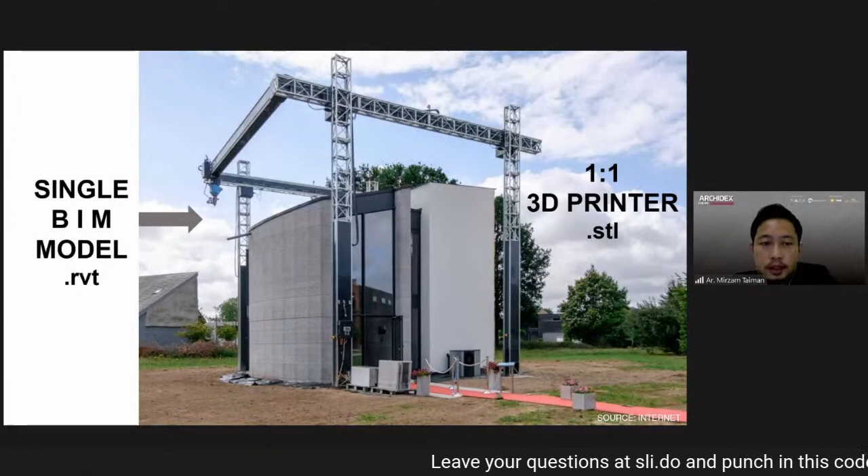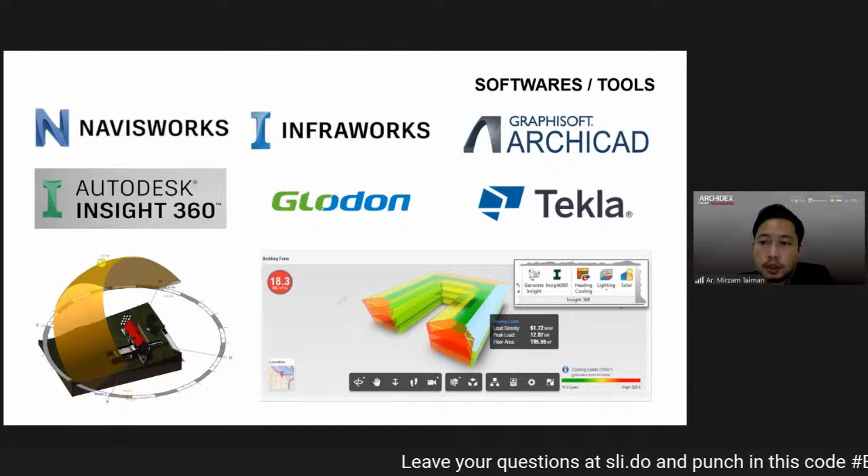Some tools that I want to share: we use several tools here, which is Archicad, and then rendering tools like Twinmotion, Lumion, and some Dynamo tools, a plugin for Revit. Another tool we use is Navisworks for collision analysis and simulations, Insight for energy analysis, InfraWorks for civil scopes, Glodon for pricing and costing, and other software like Graphisoft and Tekla for architecture and engineering.

So that's all about BIM technology. Just keep calm and adopt BIM. Be happy, don't be afraid of BIM, it gives value for architects and engineers. Thank you for this session.

Thank you, Architect Mirzam, thank you for the sharing. After we have listened to both Architect Azizul's and Mirzam's presentation, I think to our participants here this is something quite familiar with all of you. So I would like to open this to the floor for any questions or experiences you want to share. Please raise your hand and open your mic, I will cue you before you speak. Please introduce yourself. So do we have anyone who would like to start taking questions?